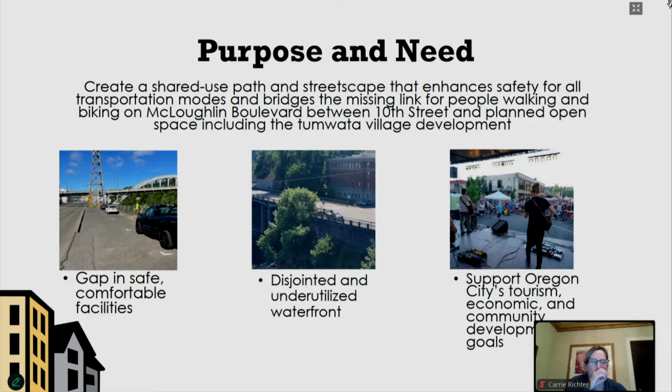The goal of this conceptual plan is just that, it's a conceptual plan. We looked at how to bring pedestrians and bikes along the viaduct part of 99E, which was built in the 40s, as well as put together a streetscape plan for sidewalk, street tree, and vegetation improvements along the non-viaduct portions. The project area is that last phase, from 10th Street down to the railroad tunnel right at Railroad Avenue, and the new Tumwata Village, which will be coming to you sometime this next year as part of their master plan.

You'll notice that Main Street has been added into the project area, and that's because when you do this kind of conceptual analysis, you have to have a no-build plan. The no-build plan, whenever you're doing an alternative analysis, asks: if nothing was done, where are pedestrians and bikes going to go? That would really be using signage and wayfinding to have people turn onto 10th Street and then Main.

If no improvements were done to the viaduct and we kept it as is, maybe with some streetscape improvements, then we would be using wayfinding, and bikes would be on sharrows on the street, and folks would be walking on the sidewalks on Main Street.

As part of this process, we held a virtual open house in December, and you'll see at the top there, our design team helped with lots of different variations of how we could potentially get bikes and pedestrians along the viaduct section of 99E. A viaduct is not a bridge, because portions of it are on basalt and some portions are not, so it's kind of a bridge structure on top of the rock.

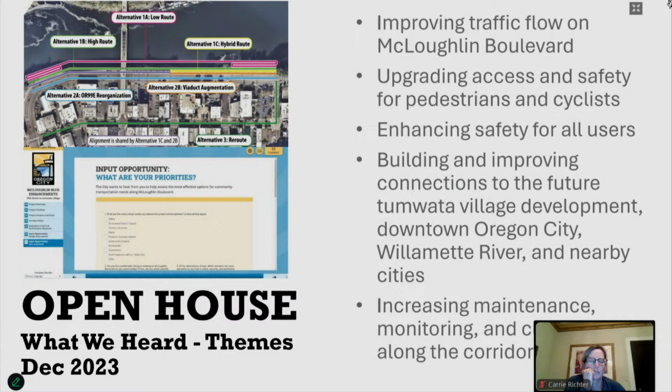Given all that work, the ODOT technical work, the geotechnical work, and the bridge design folks looked at all the options, and all of them turned out to be not promising. I'll explain why, and out of that, they started to think about, well, if none of those were promising, what could we do?

Out of that came two options: a conventional viaduct and two signature spans, which while technically workable were a bit complicated and not very visually appealing. The long span ended up being the one pursued by the City Commission in the spring, and we spent this summer doing the analysis of whether it can be constructible, but more importantly, whether it can be permittable, so a kind of fatal flaw analysis about permits.

So I like this slide because it provides a really good example of the complexity along the Willamette River. What you see here is called bathymetric readings, which is like the opposite of topography. It shows how deep the Willamette River is.

The darker the blue, the deeper it is, and the lighter the blue, the shallower it is. Where you see the numbers labeled bent 1, bent 2, bent 3, that's where they were looking at potential structural supports for all the options considered at the December open house. Those had a lot of individual pillars onto the basalt.

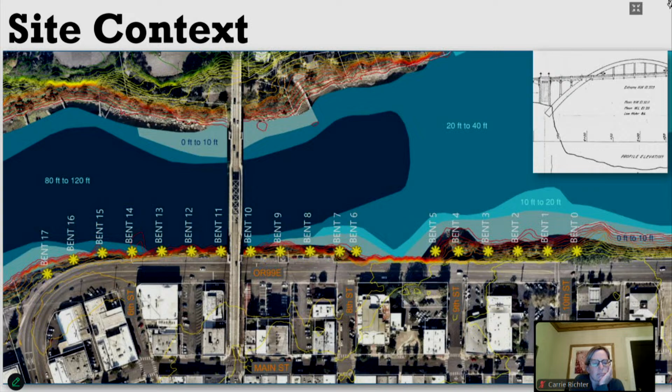The design team came to the city commission in spring and said, this is what we think is the best option. Do you want to move forward with some further conceptual studies this spring and summer to confirm that it's permittable, or do you want to move forward with the no-build option?

The commission gave direction to the design team to continue working with ODOT, finish up the conceptual study, and determine whether this could be permitted at a future design process. They've been working on that all spring and summer, and it can be.

We've learned a lot, and we've talked to ODOT. The big thing ODOT wants is a 30-foot separation between the viaduct and the structure, because they have maintenance boom trucks that need to get up and over, so that was a big design criteria. While the federal permitting process is very detailed and specific, and we are not there yet, our consultant teams work with the NEPA process a lot, so they were just pushing to see what the fatal flaws might be.

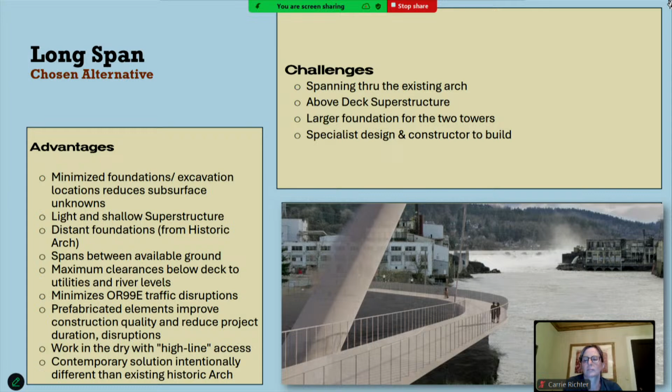Clicker is not working for me. There we go. Okay, so other things we looked at as part of our alternatives analysis was the option for placemaking and activating our riverfront. As Christina mentioned, we took a handful of options to the City Commission, and at this point the plan is to leave all of them in the plan for now. The City Commission didn't feel there were any fatal flaws with the options, so when we get to the point of refining the corridor, we'll look at those options in detail.

Those options include a concept for a linear park, which I'll show more of in another slide, as well as an option to activate the area under the arch bridge. Today there are about six permit parking spots under the arch bridge, so this is an option to consider whether we maintain that parking or not. It could be turned into more of a festival-type street or area—when Main Street has an event, it could be an extension with more booth space. We could also look at landscaping, benches, picnic tables, bike parking, or a community space that could be programmed with activities.

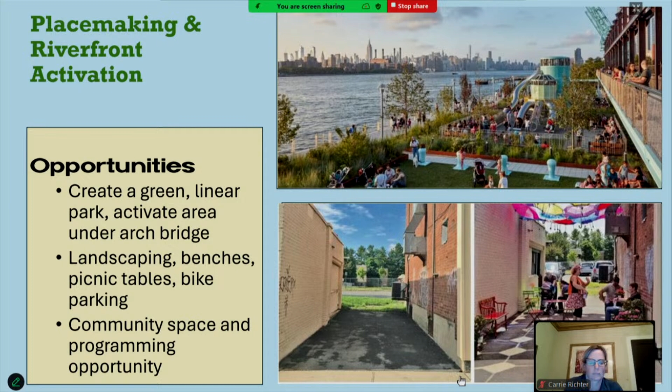Other things we could look at are streetscape options—bulb-outs, landmarks, lighting along the corridor, wayfinding signage, materials, and landscaping. The project could include some boardwalk, like Phase 1 has; right now there's a bit of a boardwalk area often referred to as the Willamette Terrace. We could look at extending that, plus art or interpretive signage. There are many options for this project. We haven't made any final decisions, but we're putting it all on the table, and when we get to a future refinement phase, we'll look at how to include those items in the corridor.

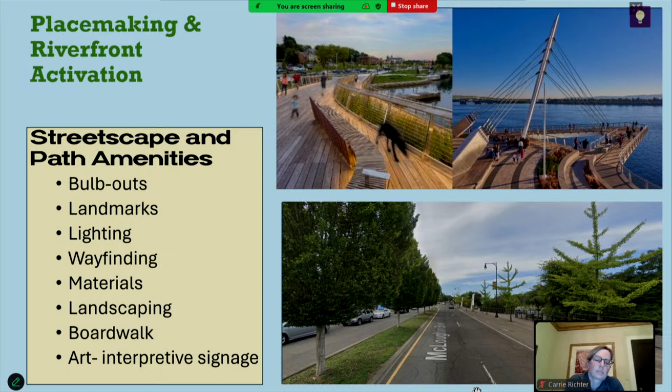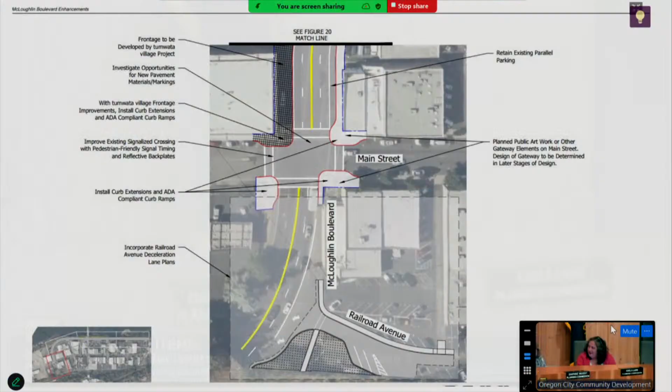Two other things real quick. There's technically River Shore Park, and it looks like the bridge is going to go right next to it. Is there any idea of doing something creative with that little space as well? Because where it bends across from the auto body is technically River Shore Park, historically. Oh, you mean the elbow down there? That little elbow, yeah. Oh, okay. Yeah, let me go here.

So you'll see right now there is a hashed out area. The Confederated Tribes of Grand Ronde received funding a couple years ago to move forward and construct Water, 4th, and Main Street on their site, and that will actually be coming to you as a land use application this winter. You'll notice that at the conceptual level it is undefined right now because we would need that level of detail. But one thing I've mentioned to Dana is, in the final version, I do want an asterisk there, because even though we're not at that level of detail, there is space that you mentioned, which is another opportunity for potentially interpretive space or gathering space. We don't have that level of detail until the Confederated Tribes have a final design for their water street, but there absolutely is a space right there.

And so in lieu of the information we would have if we were farther down the road, at this conceptual level, we can put notes and asterisks, like this area is another opportunity. So that is one thing that I definitely want to see as we move forward to the final version of the plan.

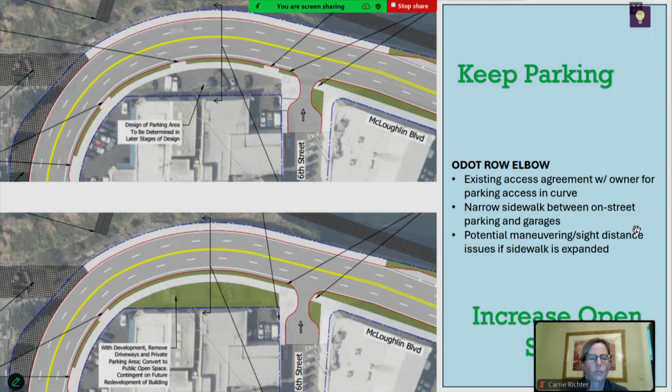The last thing I was going to bring up is obviously downtown itself, it's in transition. We're getting a lot of homeless, more so, we are getting from Portland. There's been more activity with businesses to where there's been a lot more stress on the businesses. Obviously we're looking long-term, so this may not be an issue, but long-term about security for the bridge, because we're looking at the promenade with more activity now. Downtown with more activity, I'd like to see some type of security there long-term, just as a mention. It's obviously too early for that, but I just wanted to mention it.

Thank you. Yeah, and I think that's great, and you always want to put the right notes at the right level, but even putting a line item or asterisk as we're looking at how do you build in security, how do we allude to that in our plan? Because what's nice when you have that in a concept plan, it suddenly gets built into the scope of work. So you're just helping to create the future scope of work. Thank you. All right, Commissioner LaSalle.

Is this in addition to the transportation system plan? This would be added. So the McLoughlin Boulevard Enhancement Plan is already adopted, and the transportation system plan was adopted about 20 years ago. So this would be kind of a refinement sub-plan of that into the TSP.

Would this be categorized as likely or not likely to be funded? Sure, I'm going to hand that to the Public Works Director. And I think for now, we would probably just stick it in the TSP. I think we have hopes of identifying funding to kind of relook at the transportation system plan. In theory, we've used up our available funds for likely to be funded projects with our current TSP, so we'd have to reopen that to look at it.

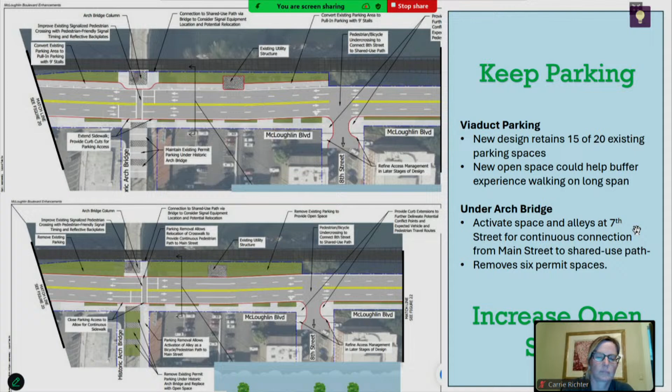Any other questions? Okay. I do have a comment card for this item. Anyone have any objection to hearing a comment? Okay, I'll call up Larry Morton.

My name's Larry Morton. I own Larry Morton's Transmission Service in downtown Oregon City, have for 46 years. I'm in the process of retiring. I intend on giving my business to one of my long-term employees so that he can keep it going for a couple more generations. Unfortunately, this plan, at least the part that affects me, figure 20A, he might survive 6 months in business. 20B, he'll be out in 2 weeks. So that's pretty frustrating after spending my whole life down there.

Some of the design issues involved are access, getting in and out. 20B is just virtually impossible to operate. It shuts down half my shop, makes it almost impossible to get to my office parking. I have no clue how they'll get in and out of there. Maybe they'll fly. But if they fly, they don't need their car fixed.

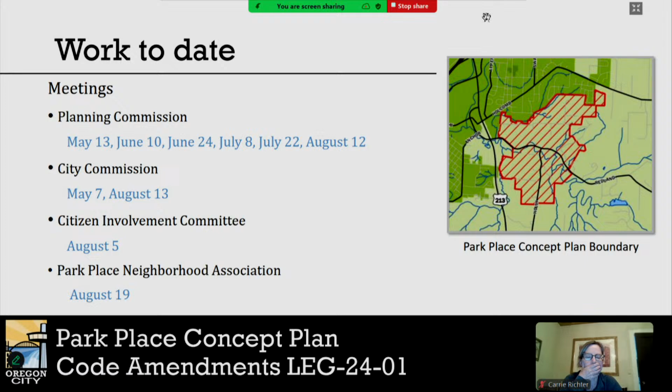Next, I'll provide a little more detail on the concept plan itself. In 2002, nearly 500 acres of rural land located east of Oregon City was brought into the Portland Metro urban growth boundary to accommodate future urban growth. The Park Place Concept Plan was developed to help the City of Oregon City prepare for this growth by working with local citizens, area stakeholders, and local jurisdictions to develop a common vision for the area.

The Park Place Concept Plan emphasizes good urban design, multimodal connectivity, opportunities for placemaking and cultivating community, diversity, and above all, a way to provide for future growth in a sustainable manner. Ultimately, the Park Place Concept Plan will ensure that the land brought into the city is planned in an efficient and sustainable way that will maximize the use of available urban land while protecting the natural resources in the study area.

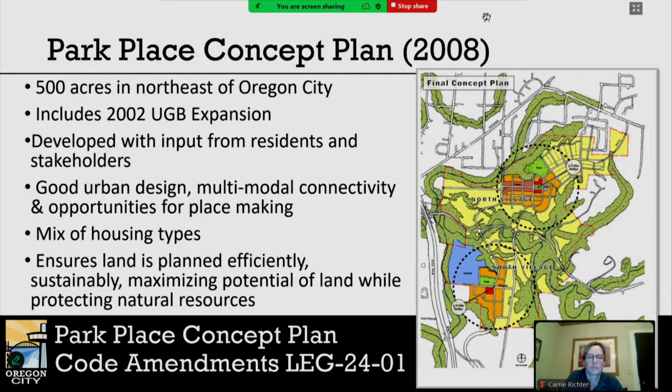Some of the components of the plan, and probably one of the most important, are the transportation projects in the plan, and those include the extensions of Holly Lane and Swan Avenue. Holly Lane was adopted into the 2013 Oregon City Transportation System Plan and is a planned collector roadway. That TSP project is Project D48, and it would connect Redland Road to Holcomb Boulevard.

It is known as the Holly Lane North Extension, described as a residential minor arterial, and the funding priority for that in the transportation system plan is long-term. The other roadway is known as the Swan Avenue extension, which would come later in the project. That is Project D49 and D50, also described as long-term and a residential collector street.

The long-term projects are those likely to be implemented beyond 10 years from the adoption of the transportation system plan. These projects are really important for the development of the transportation network, but unlikely to be funded in 10 years. Development can pay for a portion of these extensions when there is a rational nexus and rough proportionality to the impact of development.

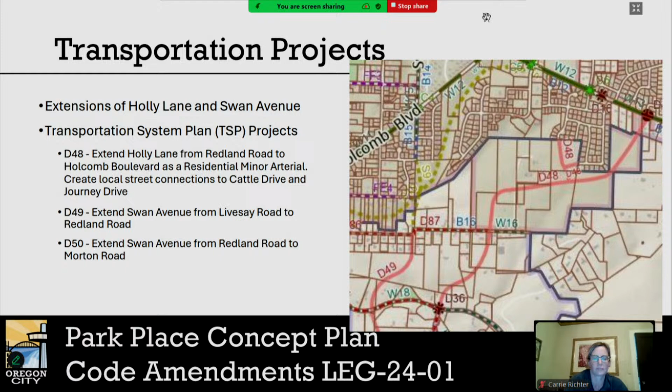Housing is a really important aspect of this plan. Since 2008, the land use paradigm in Oregon has shifted and multiple new regulations apply for housing. For example, House Bill 2001, the middle housing mandates, were adopted by the city in 2022 to allow duplex, triplex, quadplex, townhome, and cottage clusters on lots in single-family zones.

In 2017, Senate Bill 1051 changed the application of clear and objective standards to apply to all housing development, not what was formerly known as needed housing. All housing is needed housing now. Discretionary standards are no longer applicable to any housing development regardless of the classification of needed housing. Needed housing means housing by an affordability level prescribed in statutes, and necessary to accommodate the city's allocated housing need over a 20-year planning period.

Most recently, in 2024, Senate Bill 1537 requires that jurisdictions also grant mandatory adjustments to their development code if a development meets certain thresholds.

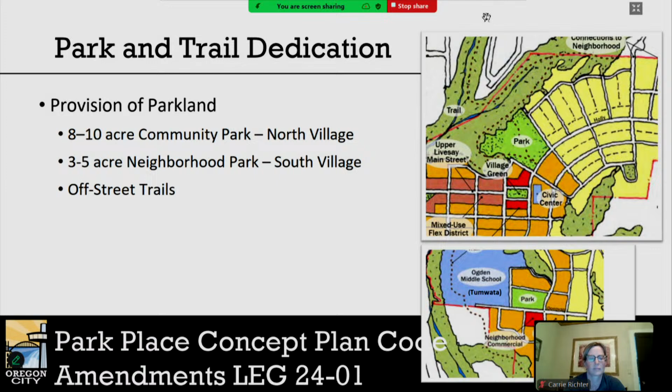The area currently along Livesay Road and also near Donovan Road, south of Redland Road, is eventually envisioned to be a small-scale neighborhood commercial zone. As proposed in the existing code, this allows the same kind of land uses as our mixed-use corridor zone, but at a smaller scale, with smaller building footprints and lower height limits.

As proposed, there will be a more limited set of uses for the neighborhood commercial zone. Also, in that zone previously, there was a 50% cap on residential use. As proposed, after discussion with the Planning Commission and the City Commission, we're moving towards not allowing any residential use in the neighborhood commercial zone on the ground floor within 100 feet of Livesay Road. I'll talk more about that on a subsequent slide.

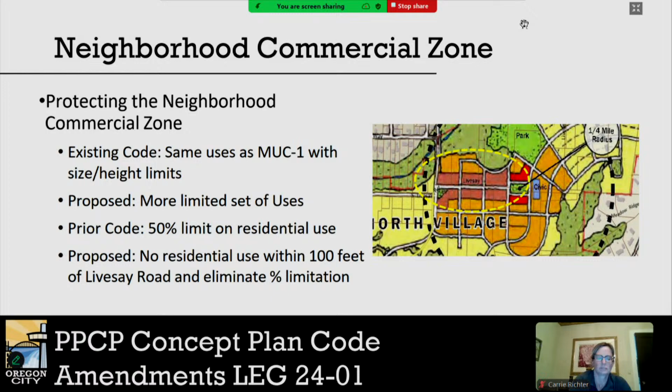Stormwater management in the Park Place concept plan is talked about as a tiered level of management. The first level would be on-site retention to try to infiltrate your stormwater on-site using a best management practice known as LID, or low impact development, which includes rain gardens, swales, and other infiltration designs.

The second level is on-site stormwater management, but a little larger scale. It could include detention on-site. Level 3 is your larger facilities that drain water off-site to a larger detention or retention facility. And then level 4 is a fee in lieu of that.

These concepts for stormwater management have been adopted into the city's stormwater and grading design manual and our stormwater standards in chapter 13.12. They are trying to mimic the natural hydrology of the area while managing new urban impervious surface areas.

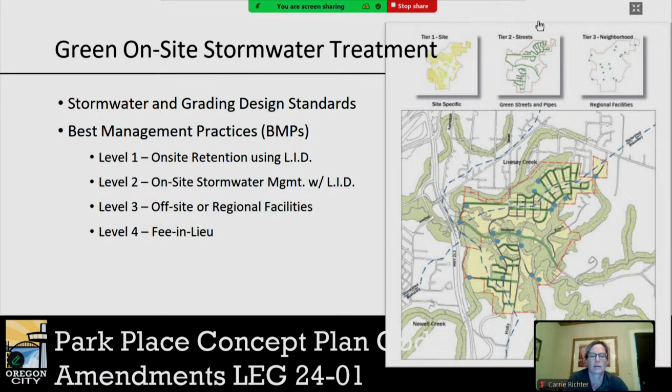As far as the neighborhood commercial zone market, staff hired Johnson Economics to evaluate expected development of these neighborhood commercial designated parcels within the Park Place concept plan. This report included a site analysis, a look at the regional market area, demographics, and also the impact of design standards.

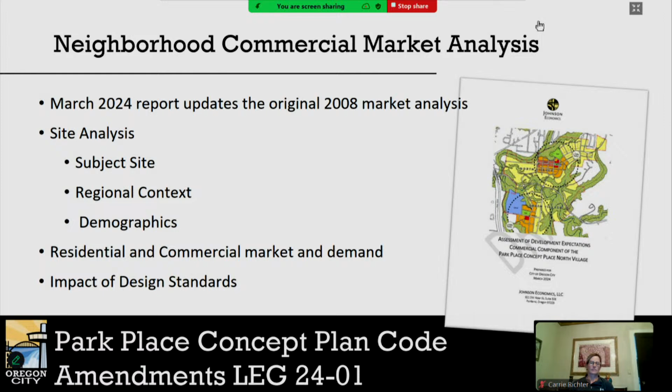Some of the outcomes from that report are summarized here. There would be roughly 1,800 households in the primary market area that this area ultimately serves. Currently, retail vacancies are rising sharply with weaker demand for retail space. Residential density and buying power in the area is somewhat limited. Much of the retail demand is already met by supply outside of this area by larger shopping facilities. The Holly Lane Redland Road connection is absolutely necessary for viable commercial use, both for transportation, vehicle connections, and visibility.

Larger retailers generally prefer a more central location for convenient cross-shopping, and smaller scale retail services could be supported in the neighborhood commercial zone if residential development happens first. This outlook could change with increased development, both locally and regionally.

As far as the economic impact of design standards, most of the city's adopted commercial design standards are not proposed to change markedly with respect to things like building orientation and parking, site setbacks, prohibitions on drive-throughs and gas stations.

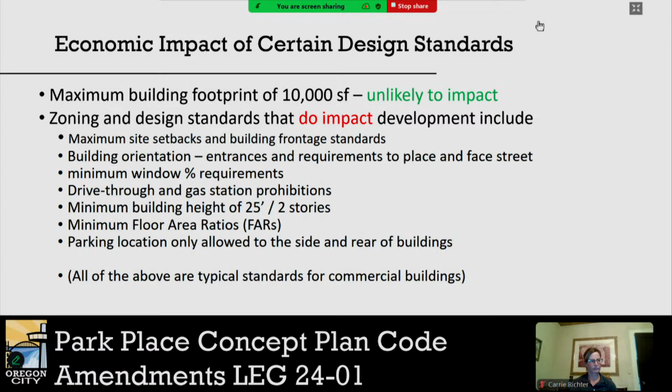Other neighborhood commercial considerations are that the plan envisions mixed-use neighborhoods with commercial zones that integrate commercial land, residential, and public open space along Livesay Main Street. Potential uses could be coffee shops, bookstores, dry cleaners, and cafes, as well as civic uses.

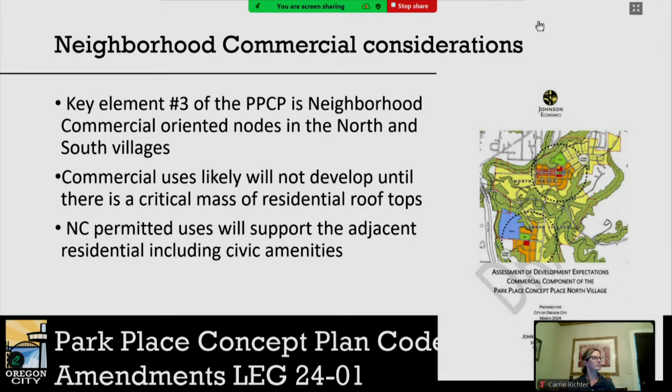The outcome of the assessment is that the site will need a substantive amount of the planned residential development to be completed, as well as the Holly Lane connection between Holcomb and Redland Road, before commercial development is viewed as viable. So now I'm going to start transitioning into what the actual code amendments are that we're talking about.

We started this code revision process by reviewing 11 key elements in the concept plan and comparing those against the zoning code. We drafted an implementation memorandum which describes which of those elements have been codified and where revisions are needed to further implement them with clear and objective standards. The proposed code revisions were drafted within that paradigm of clear and objective standards.

Through this work, we identified 9 chapters for revisions and 1 potential update to the transportation system plan to incorporate the adopted trails and multimodal connectivity. So let's go over these amendments.

As I said, the items that the Planning Commission has already reviewed, I'm going to give a more general overview for, but if there is additional revision based on input from the City Commission, I'll be providing a little more detail and showing you that red line code, which is in your packet already.

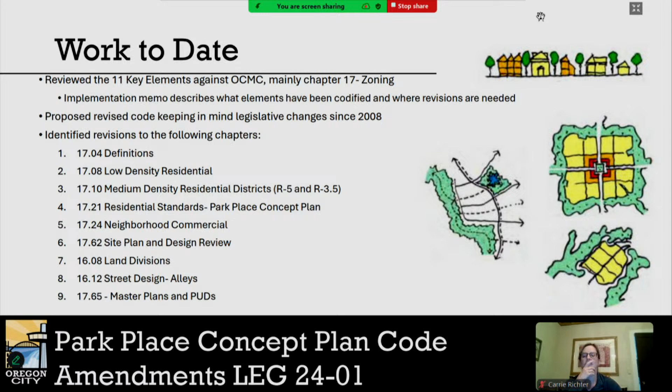First item that we're talking about will be the street design section of our public improvements, chapter 16.12, alleys. This revision creates a new clear and objective standard that offers a modification to the requirement for alleys when the development project is within a sensitive natural resource overlay district, a geologic hazard overlay district, or in the transition zone.

The public alley access may not be feasible nor practicable in these areas due to the additional grading, cut and fill, and impervious surfaces that alleys require, and the need to minimize disturbance to natural resources and steeply sloped or unstable sites.

A third modification was added to exclude development that abuts the Park Place concept plan boundaries from the alley service requirement, since including an alley at the rear of those abutting lots would defeat the purpose of having a green buffer concept and a separation between existing residential development and new residential development within the concept plan area, as well as to meet the requirement for blocks with 2 tiers of lots that abut one another, like a typical block system.

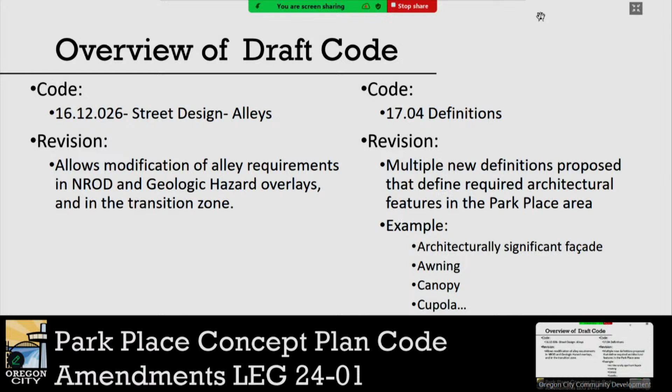Through a Type 2 process, an applicant may request modification of this standard as part of their application for land division or other land use application. Additionally, several new definitions were needed in the code to clearly define various design and architectural features and options in the neighborhood commercial areas.

Next, we have the chapter for low-density residential districts. That's chapter 17.08. This includes revisions for new setbacks between existing dwelling units outside the concept plan area and new units within the concept plan area. There's been some formatting for better readability.

Within this chapter, there will be a setback of 40 feet between dwellings. That's an existing dwelling outside the concept plan area and a new dwelling within the concept plan area must be separated by at least 40 feet.

We had also discussed at the Planning Commission level having the transition area specify that lots in the new development areas would have to meet the minimum lot sizes for the abutting existing adjacent residential zone. The City Commission asked us to be more specific and make sure that—my next slide will explain this.

The City Commission wished for the transition lots to meet all of the minimum dimensional standards of the abutting zone district outside the concept plan area, not just the minimum lot size. So that would apply to lot depth, lot width, lot size, setbacks, and height limits for the unit types.

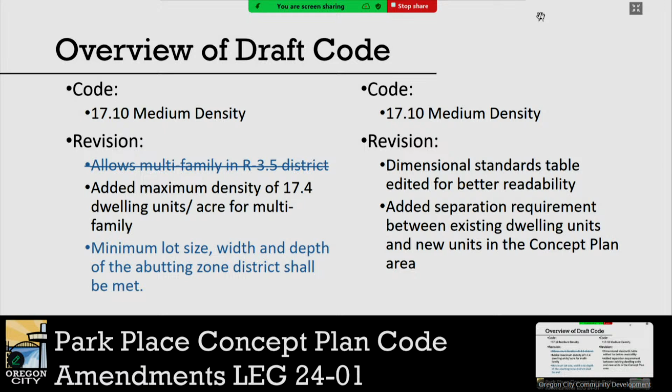City Commission directed staff not to change the code to allow multifamily in the R3.5 district without a type 3 master plan, which is what the current code requires. As I've mentioned in the past, there is no R3.5 currently in the Park Place concept plan. The default medium density zone in that area is the R5 zone, which does not allow multifamily. But if someone were to request a zone change to R3.5 and have it approved, that would have potentially allowed for multifamily as a by-right use in that zone. The reason we discussed doing that was because we needed to adopt a clear and objective standard for housing and couldn't have a discretionary path for a residential use. So we're keeping that section of code the same as it was, based on City Commission direction.

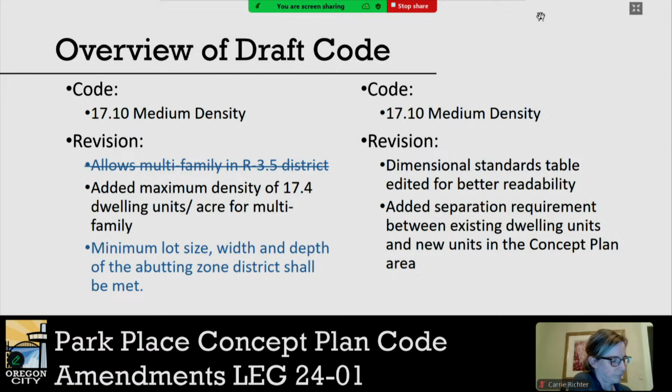And similar provision for the medium density zone, that transition lots meet the minimum dimensional standards of the abutting zone district, not just the minimum lot size.

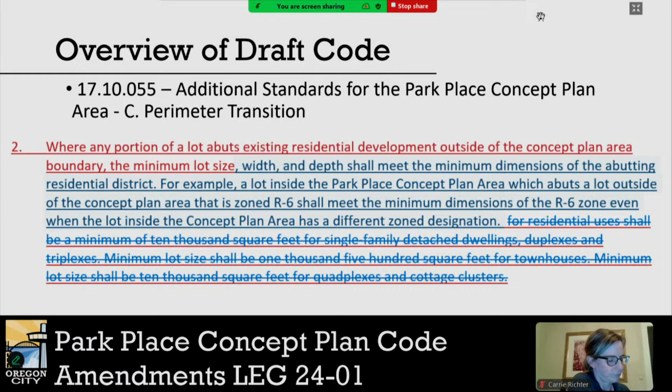Next, the residential design standards that are applied to new home design during the building permit process. This would be reviewed after a residential development has been approved and platted, but we needed to revise this to remove the formerly discretionary language, which referred to various architectural styles but did not provide any specific requirements for those styles. So we've added clear and objective design elements to improve visual interest, and this applies to all new residential development except multifamily, live-work, and mixed use. Design elements included and refined through this process cover roof design and pitch, massing, porches, pedestrian connections, architectural details, materials, windows, garages, and accessory structures.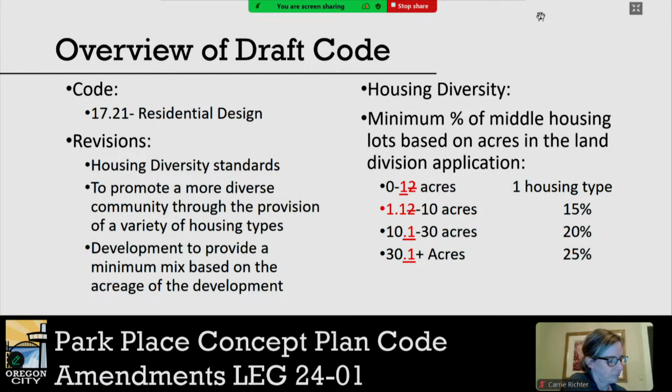Along with that, we have written a new housing diversity standard that requires those middle housing units be dispersed throughout the development, and I'll explain how that works. The code language requires that, to achieve a better distribution of housing types within a residential development, no more than 3 middle housing lots shall be permitted to abut one another.

For purposes of this section, abut or abutting means that lots share a common lot line for a minimum of 10 feet. The standard is applicable only to residential subdivisions or partitions at the time of land use review. The middle housing lot shall be identified on preliminary plans and the final plat of the subdivision through a plat note. Following recordation of a final plat that complies with that section, the standard shall be deemed to have been met. The standard does not preclude future additional middle housing units or middle housing land divisions within a residential subdivision or partition, even if those additional units or lots may not comply with the abutment requirement.

So we thought a lot about that and came up with this as a clear and objective way to try to disperse the middle housing units throughout the development. The intent is to provide a minimum amount of middle housing dispersed more evenly throughout the development and not concentrated in one area, meeting the intent of the concept plan to provide more diversity of housing throughout the residential areas.

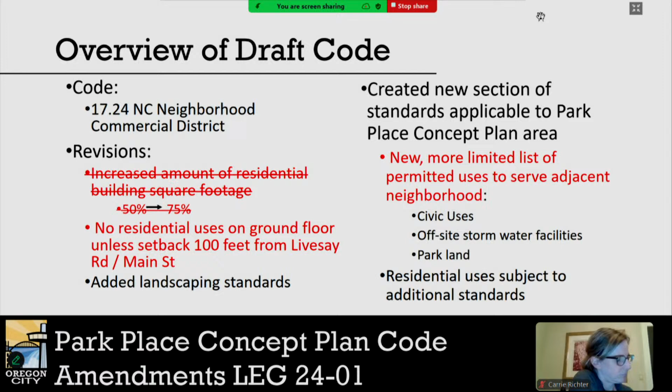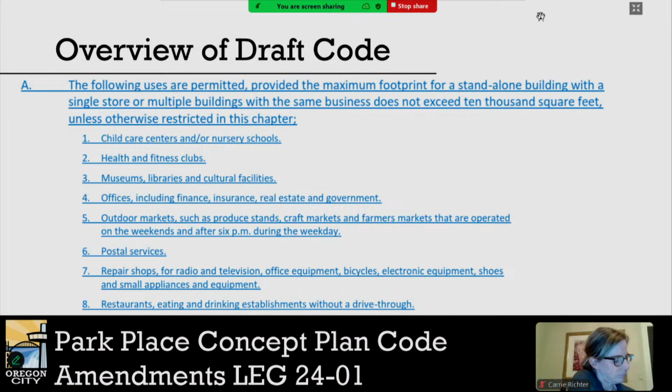On the uses section, this has been revised since you saw it last. The permitted uses in the zone we listed out individually rather than cross-referencing the mixed-use corridor zone district as before. Also, the code that limits the maximum footprint of a building or buildings with these uses to 10,000 square feet has been relocated to this section. Many of these uses are ones we've discussed previously, including small-scale service uses and retail facilities.

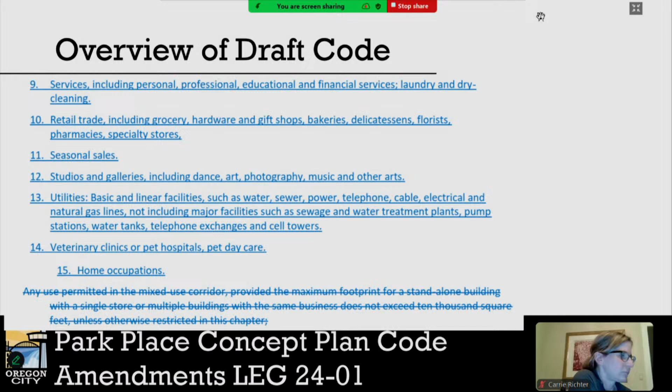The proposed revision for the code for prohibited uses states that residential use on the ground floor, unless set back a minimum of 100 feet from the property line along Livesay Road / Main Street, be prohibited.

The dimensional standards for that zone include a minimum landscaping requirement of 20%, and the Planning Commission had added an allowance for low-impact development, like rain gardens and things I just mentioned, to be counted towards that minimum landscaping requirement.

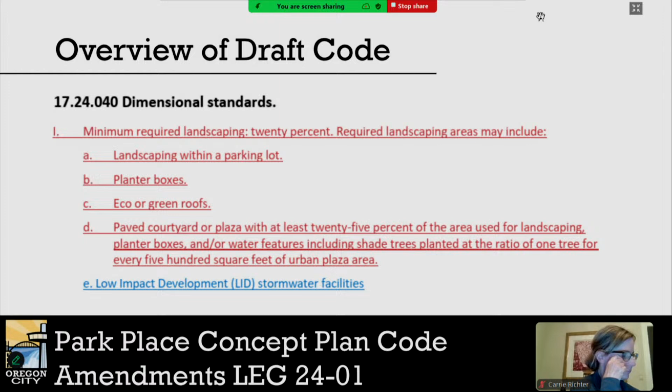Next, we move into the additional standards that apply for the Park Place concept plan area, which includes certain additional permitted uses. Planning Commission saw this language in August. The list of additional permitted civic uses has been revised to exclude mobile food units. Outdoor markets were already a permitted use in the neighborhood commercial zone, so there's no need to list it as an additional permitted use here.

To protect commercial land, off-site stormwater facilities less than a half acre and parkland improvements less than 0.75 acres were added to this section so those specific restrictions would only apply to the neighborhood commercial in the Park Place area. The size restrictions have been added to protect commercial land. If a park or off-site stormwater facility needed more acreage, an applicant could make a variance application as part of their land use application or site plan and design review application.

To make these facilities a better public amenity, City Commission recommended that there be a public access and maintenance agreement, as well as certain recreational amenities, minimum of a soft surface trail at least 4 feet wide and at least 3 benches.

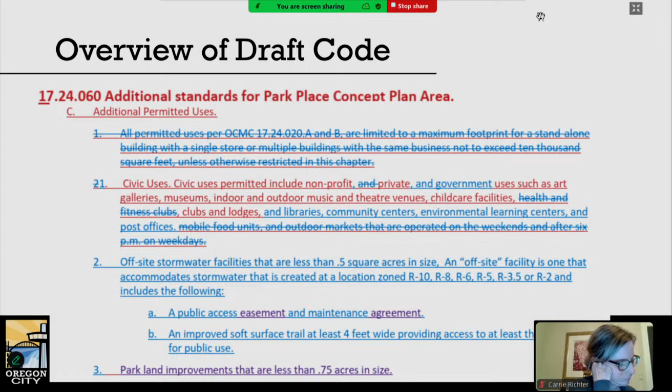Regarding residential uses in the NC zone, the additional standards were modified after initial review to allow a greater amount of residential use, but following City Commission discussion, the direction was to simplify the standard to only permit ground floor residential use if set back 100 feet from Livesay Road.

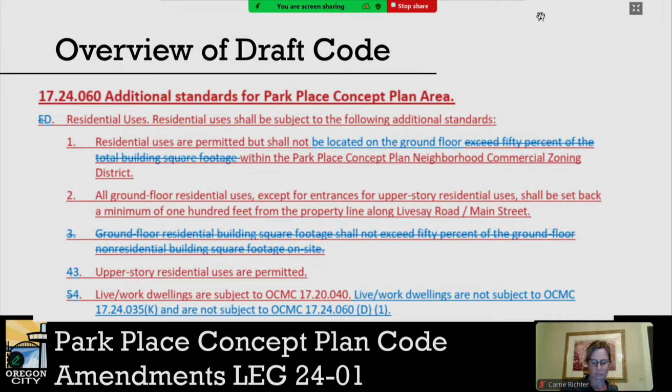The way this is currently written, you'll notice 1 and 2 under D there. Item 1 states residential uses are permitted but shall not be located on the ground floor within the Park Place concept plan. Item 2 says all ground floor residential uses, except for entrances for upper story residential use, shall be set back a minimum of 100 feet from the property line along Livesay Road. So the way sections 1 and 2 currently read, it creates a little confusion. Staff would recommend that this language be clarified, and I'll show you what that might look like on my next slide.

Okay, moving on. That takes care of the changes to the neighborhood commercial zone. Next, we'll be talking about the site plan and design review criteria and land division criteria for park, trail, and open space requirements.

These revisions are an entirely new section of code devoted to park and trail dedication. Open space dedication is voluntary and based on existing requirements in the Natural Resource Overlay District. The intent of this code language is to have a clear, objective, and proportional way to get to the 8-acre North Village Community Park, which has a minimum acreage dedication of 3 acres, and the South Village Neighborhood Park, which would have a minimum dedication size of 2 acres.

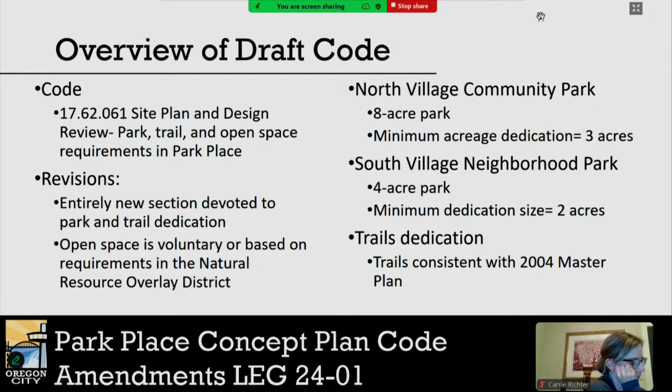Trails dedication would be consistent with the 2004 master plan. We've added some additional language to cross-reference the soon-to-be adopted 2024 Parks Master Plan. So not a whole lot of changes with respect to the dedication aspect of this, but what I'll be talking about next are the proposed clarifications to code for the fee in lieu of dedication.

There's a clarification of non-residential fee in lieu of dedication to be held in a separate account. System development charge reimbursement would be available through the process in our existing system development charge code. As I mentioned, we're going to cross-reference the 2024 Parks Master Plan.

We also wrote in some additional standards for acceptance of parkland dedication, including a maximum slope requirement, and a requirement that there be no wetlands within the park dedication area. However, a park dedication area could include up to half of the required vegetative corridor buffer specified in the Natural Resource Overlay District, and that buffer can be fairly extensive depending on where the protected resource is, varying from 15 feet up to 50 feet from the edge of the resource.

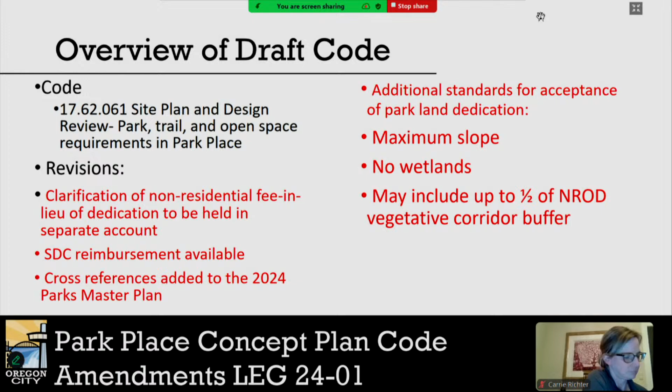That sounds good. Timeline. So with respect to non-residential development park dedication, the Park Place Concept Plan calls for provision of an 8 to 10 acre community park and a 3 to 5 acre neighborhood park, connected by an extensive system of off-street and on-street trails.

As with the discussion of critical road infrastructure, the city is constrained in its ability to exact parkland dedication and improvements to that which is roughly proportional to the impact of development. We've proposed a formula similar to the one in place for residential development within Thimble Creek, requiring that parkland dedication be based on the number of individuals per dwelling multiplied by the number of dwelling units at 4 acres per 1,000, a ratio from the Parks Master Plan. Under that approach, every new housing unit would contribute its fair share for a park. If future development is so piecemeal that it precludes dedication of the minimum amount, the city would have to be prepared to buy whatever remaining pieces are necessary using funds collected through fee in lieu or through negotiation if necessary.

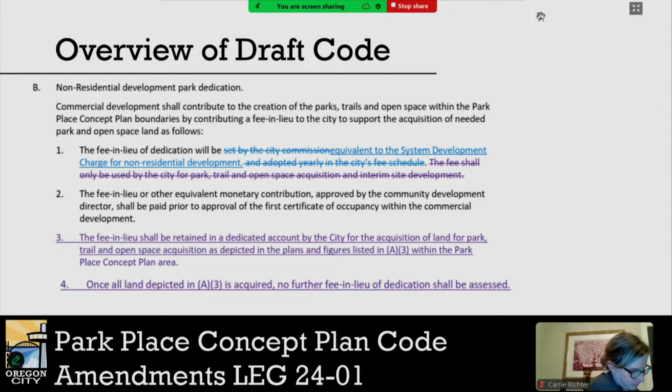For residential development park dedication, we've included cross-references to the system development charge chapter on reimbursement for applications that propose more than the required amount of park or trail. The SDC chapter includes relevant methodology for requesting and calculating the amount of an eligible reimbursement for a public improvement, which includes parks and trails.

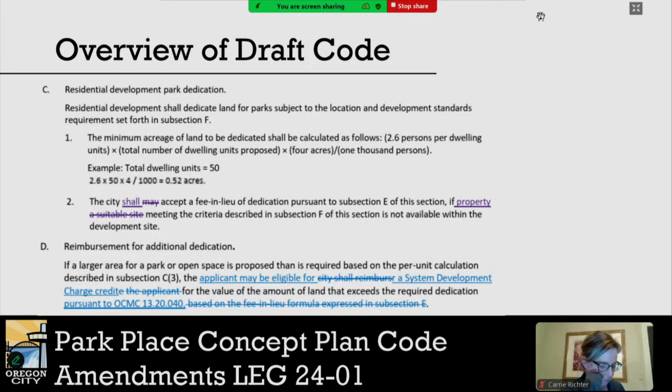The fee in lieu of dedication section specifies that the fee in lieu be assessed based on SDC calculations at the time of land use application. This simplifies and standardizes the calculation and assures consistency with the SDC chapter. We've also discussed how the fee in lieu account would be set up with our finance department, and they are of the opinion that it is a workable way to implement that fee in lieu.

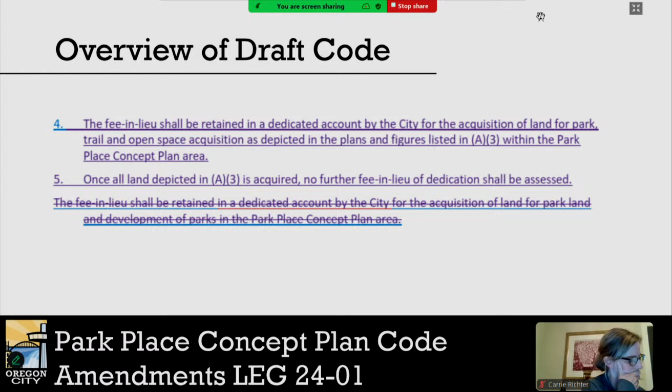As far as the additional standards for acceptance of parkland dedication, for the North Village Park, which would be 8 acres, not more than 20% of the park may exceed 15% slope prior to grading. None of the park may include a wetland, stream, or other protected resource, except that up to half of the required vegetative corridor width adjacent to a protected resource specified in the Natural Resource Overlay District may be included within the park boundary. For the South Village Neighborhood Park, it's similar, except that no more than 10% of the park may exceed 15% slope.

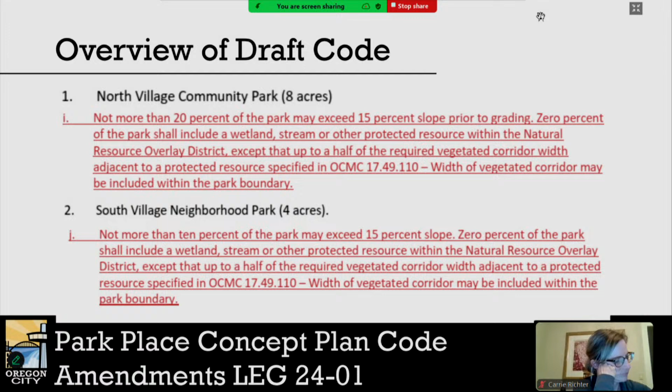With respect to the trail dedication standards, we've added a clarification with a cross-reference to the 2024 Parks Master Plan. There is an option for fee in lieu of dedication for trails. The amount of trail dedication is based on the ratio of 0.35 miles per 1,000 residents, which equates to 1.8 feet of linear trail per resident. As you recall, there are also width requirements, and soft surface and hard surface requirements in the code that we've already discussed. If the above standards cannot be met for dedication, a fee in lieu is acceptable.

Fee in lieu shall be determined by a licensed, city-selected appraiser retained by the applicant, who would value the market rate of the land, assuming that zoning and other land use entitlements necessary for trails are in place. Trail dedication may also be eligible for SDC credits if more than a proportionate share is dedicated and built, and fee in lieu may also be eligible for SDC credits pursuant to the System Development Charge chapter.

Final amendment, which the City Commission did not make any changes to, is the Master Plans and Planned Unit Developments chapter, where we added language explaining that there is a clear and objective process that meets code for housing, and if an applicant chooses a discretionary process, they can opt for the master plan type 3 review through the Planning Commission. So that's the overview of the code amendments. The process from here forward, we'll work through the public comments and see where this goes. Thanks. Thank you.